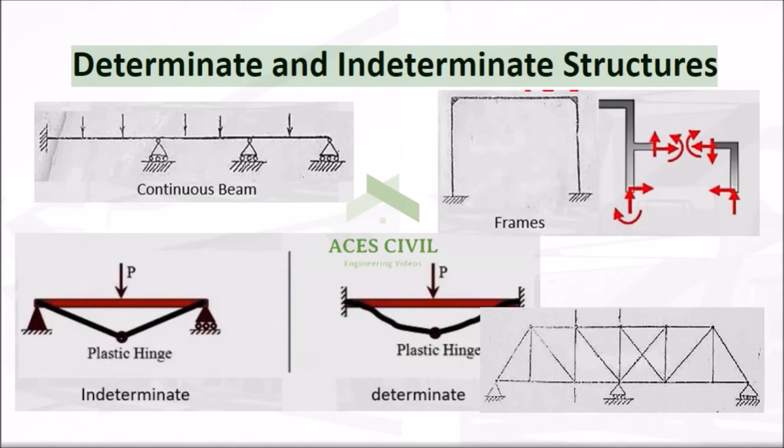In today's video we are going to discuss determinate and indeterminate structures. What is a structure? Why do we need to do analysis on a structure? Have you ever walked under a bridge or a megastructure and seen different joints between the beams and columns in the structure? Perhaps you've seen rollers and hinges and wondered if that is enough to support the structure. Isn't a fixed end more stable than a roller or a hinge?

Well, the answer is yes. However, sometimes stability creates risk of more exposure to types of stress, such as thermal stress.

A structure is an assemblage of a number of components like slabs, beams, columns, walls, foundations, and so on, which remains in equilibrium. It has to satisfy the fundamental criteria of strength, stiffness, economy, durability, and compatibility for its existence.

Any structure is designed for the stress resultants of bending moment, shear force, deflection, torsional stresses, and axial stresses. If these moments, shears, and stresses are evaluated at various critical sections, then based on these, the proportioning can be done.

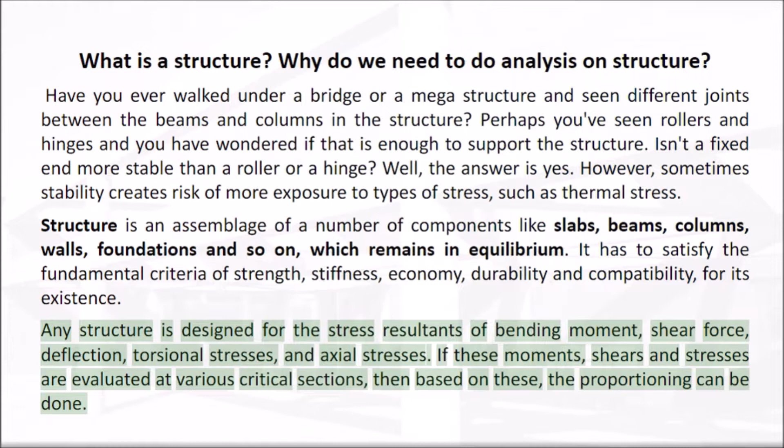An engineer's duty is to design structures in a professional, safe, and economical manner in order to fulfill the purpose for which it was designed in the first place.

Evaluation of these stresses, moments, and forces and plotting them for that structural component is known as analysis. Determination of dimensions for these components based on these stresses and proportioning is known as design.

Structural analysis. Structural analysis is the calculation of reaction forces, internal forces, stresses (shear and normal), bending moments, deflection, angle of rotation, etc. on a given structural member, provided different forces are determined.

Structural engineers make structural analysis in order to design structures to withstand the effects of possible forces on structures. Structures are generally classified into two categories, determinate and indeterminate (or redundant) structures, for analysis of structures to find forces.

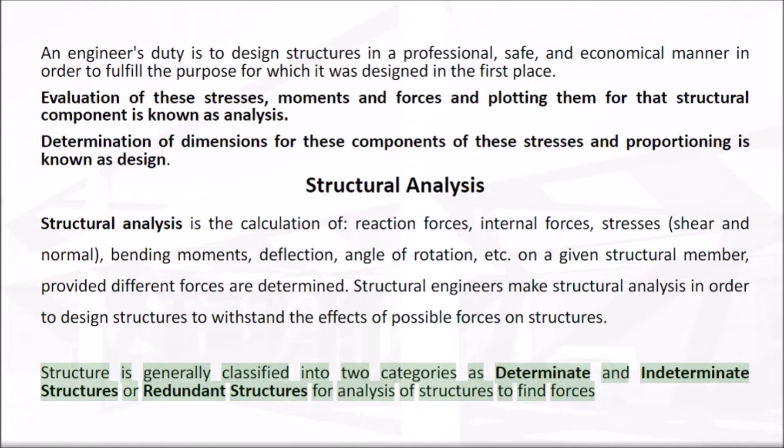Statically determinate structures are structures that can be analyzed using statics equations only, i.e., equilibrium in all directions. In some cases, statics, which means the sum of forces in any direction is zero and hence no acceleration is experienced, is enough to analyze a structure. These structures are referred to as statically determinate.

On the other hand, statically indeterminate structures can't be analyzed using statics equations only. They require other material properties, such as deformations, in order to analyze them.

Redundant or indeterminate structures are not capable of being analyzed by use of basic equilibrium equations alone. Along with the basic equilibrium equations, some extra conditions are required, like compatibility conditions of deformations, etc., to get the unknown reactions for drawing bending moment and shear force diagrams.

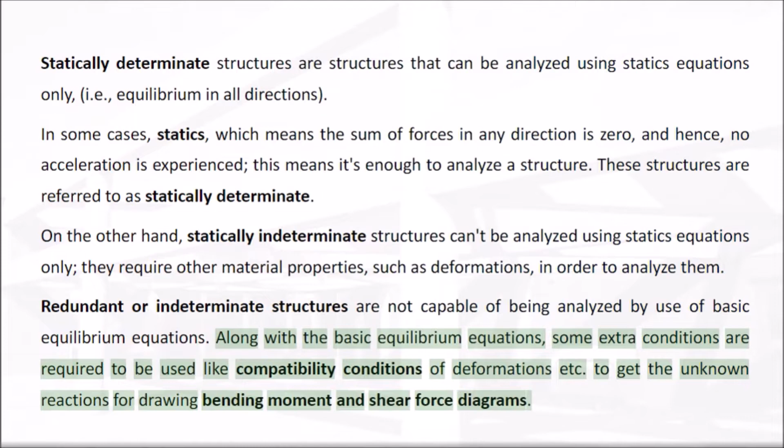A structure can be called determinate if the equilibrium equations provide enough and sufficient conditions for equilibrium. If all forces for a structure can be determined using equilibrium equations only, the structure is determinate. But if the unknown forces are more and can't be determined using equilibrium equations, then the structure is indeterminate.

In general, we can determine if a structure is statically determinate or indeterminate by drawing a free body diagram for the structure or part of it, and comparing the number of unknown forces and moment components with the number of available equilibrium equations. For coplanar structures, we have three equilibrium equations.

If n is the total number of parts and r is the number of unknown forces and moment components, then if r equals 3 times n, the structure is determinate. If r is greater than 3 times n, the structure is indeterminate.

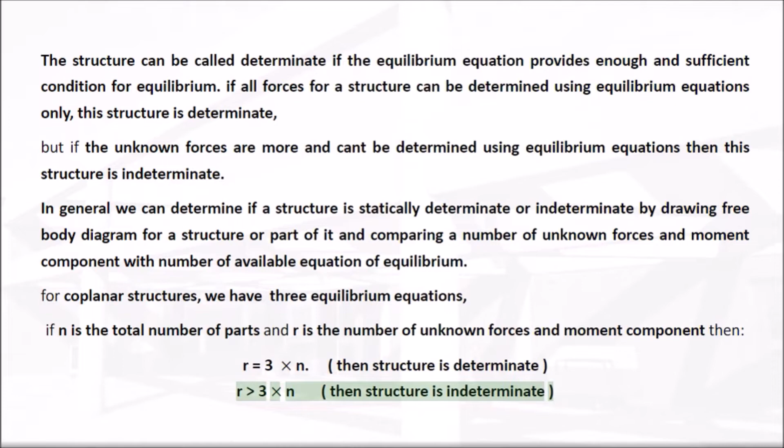In two-dimensional statics, the summation of forces in the x and y directions, and the summation of moments in the z direction, all must equal 0. In three-dimensional statics, the summation of forces in x, y, and z directions, and the summation of moments in x, y, and z directions, all must equal 0.

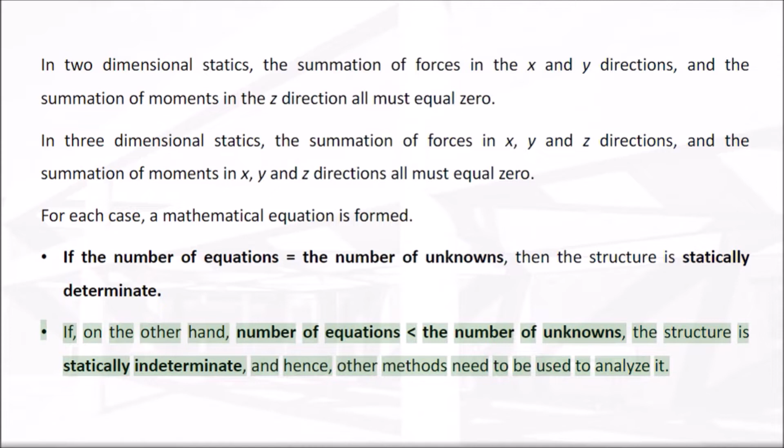For each case, a mathematical equation is formed. If the number of equations equals the number of unknowns, then the structure is statically determinate. If, on the other hand, the number of equations is less than the number of unknowns, the structure is indeterminate.

Some examples of statically determinate structures are shown in the figure above. Beams number 1 and 2 are statically determinate structures for the following reasons. Beam number 1: the number of unknown forces is 3, equal to the number of equations, which is 3. Beam number 2: the number of unknown forces is 3, equal to the number of equations, which is 3.

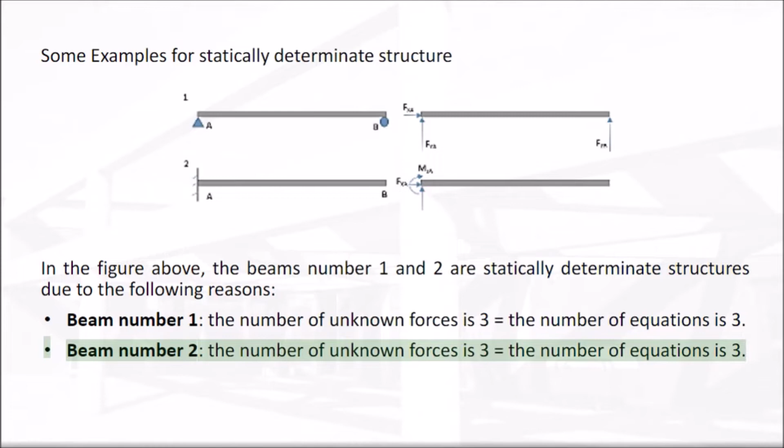Examples of determinate structures are simply supported beams, cantilever beams, single and double overhanging beams, three-hinged arches, etc.

Examples of indeterminate structures are fixed beams, continuous beams, fixed arches, two-hinged arches, portals, multistoried frames, etc. Special methods like strain energy method, slope deflection method, moment distribution method, column analogy method, virtual work method, matrix methods, etc. are used for the analysis of redundant or indeterminate structures.

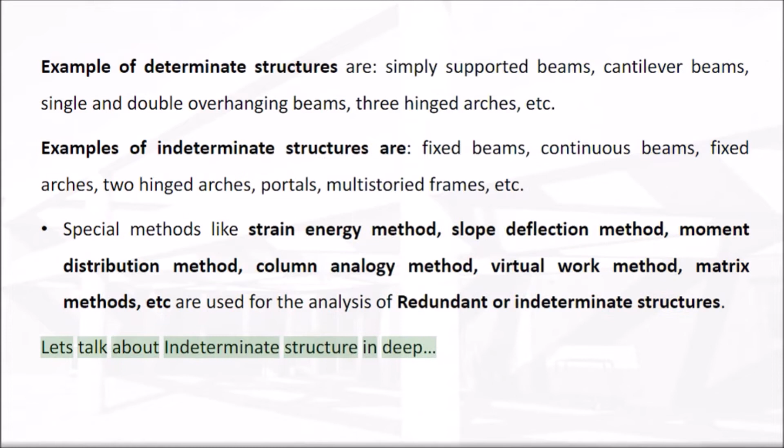Let's talk about indeterminate structures in depth. A structure is termed as statically indeterminate if it cannot be analyzed from principles of statics alone, that is, summation H, V, M is equal to 0 respectively.

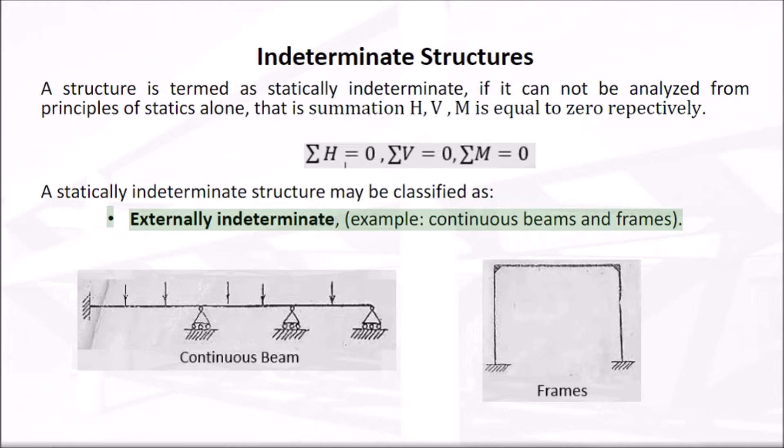A statically indeterminate structure may be classified as externally indeterminate, example, continuous beams and frames. If a structure is externally determinate, then all of the reactions may be calculated using equilibrium alone. To calculate external determinacy, the following equations are used.

Statically unstable externally: R less than 3 plus EC. Statically determinate externally: R equals 3 plus EC. Statically indeterminate externally: R more than 3 plus EC. Where R is the number of reaction components, and EC is the number of equations of condition.

Both of these are described in detail below. The degree of indeterminacy is given by the following equation: IE equals R minus (3 plus EC).

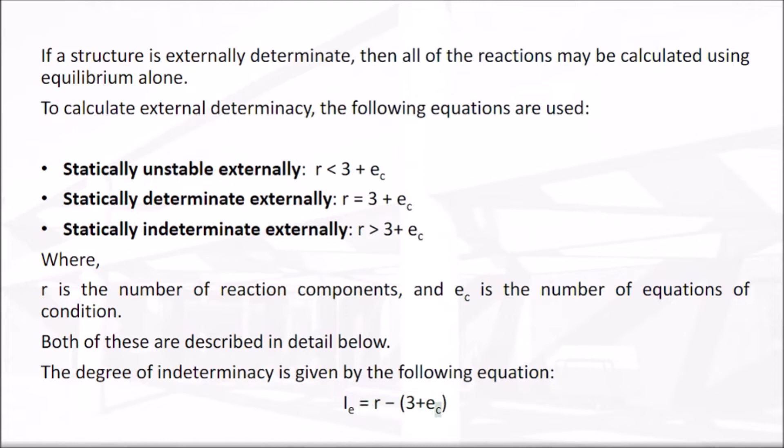Reaction components. In the equations above, R is equal to the total number of reaction components as shown in table. For multiple reaction points, R is the sum of all the components for all the reaction points in the structure. Support type schematics and reactions R.

Roller: R equals 1. Pin: R equals 2. Fixed: R equals 3.

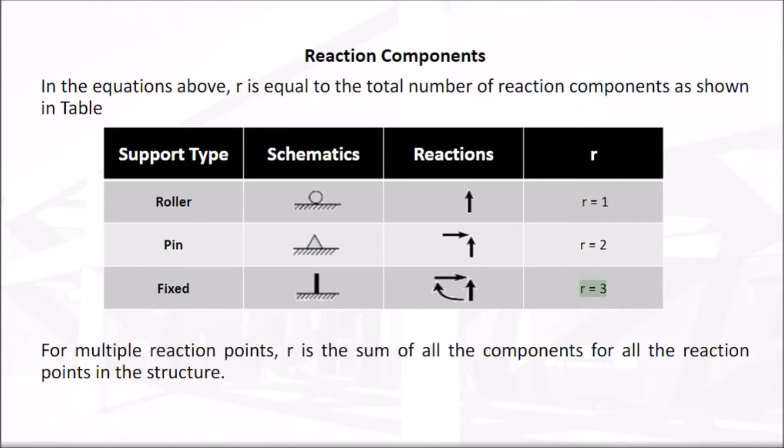Internally indeterminate, example, trusses shown in figure. If a structure is internally determinate, then all of the reactions and internal forces may be calculated using equilibrium alone. Internal determinacy is generally much more important than external determinacy in structural analysis. To calculate internal determinacy, the following equations are used.

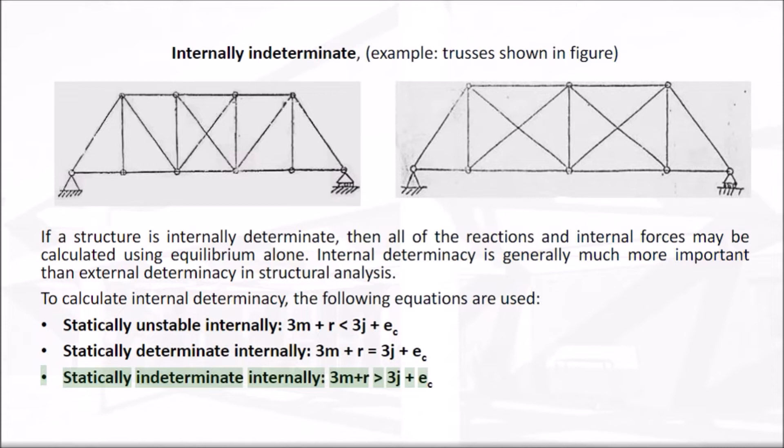Statically unstable internally: 3m plus R less than 3j plus EC. Statically determinate internally: 3m plus R equals 3j plus EC. Statically indeterminate internally: 3m plus R greater than 3j plus EC.

Where m is the total number of members in the structure, R is the number of reaction components, J is the total number of joints in the structure, and EC is the number of equations of condition. The meaning of R and EC are the same as for external determinacy.

The degree of indeterminacy is given by the following equation: IE equals 3m plus R, minus 3j plus EC.

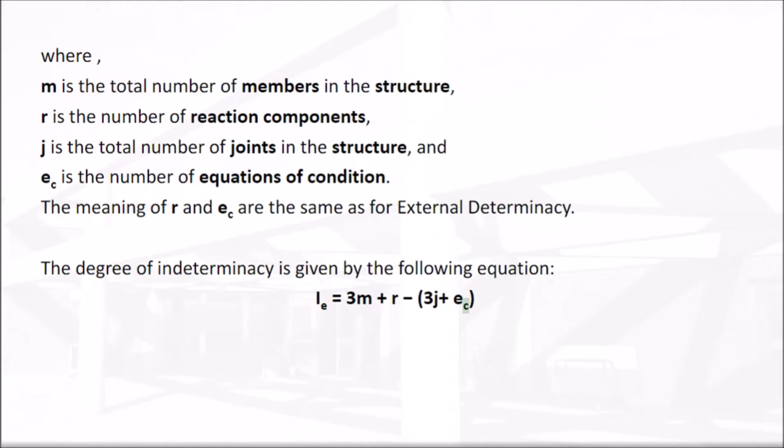Members and joints. There is no specific way that a structure must be split into members and joints for the purposes of the determinacy analysis. Any division of the structure is okay as long as the members and joints are consistent with each other.

However, joints should be placed at least at the following locations: free ends, reactions, and intersections of three or more elements.

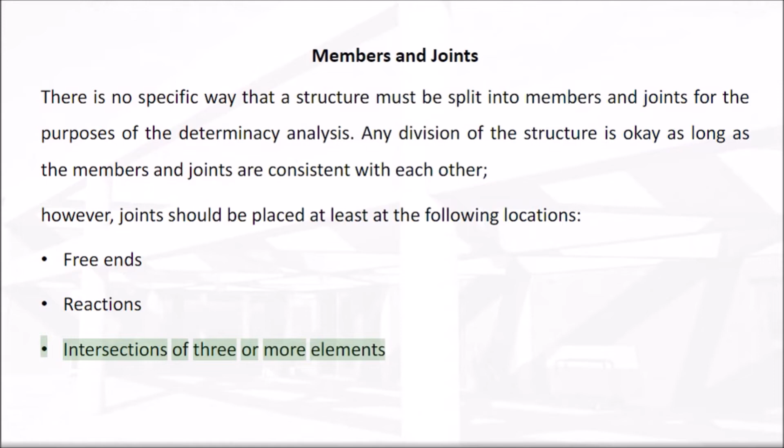Both externally and internally indeterminate, example, trussed beams, continuous trusses. A truss is statically determinate, both externally and internally when: A. All the reactions can be determined from the conditions of equilibrium, namely summation H, V, M is equal to 0 respectively, and

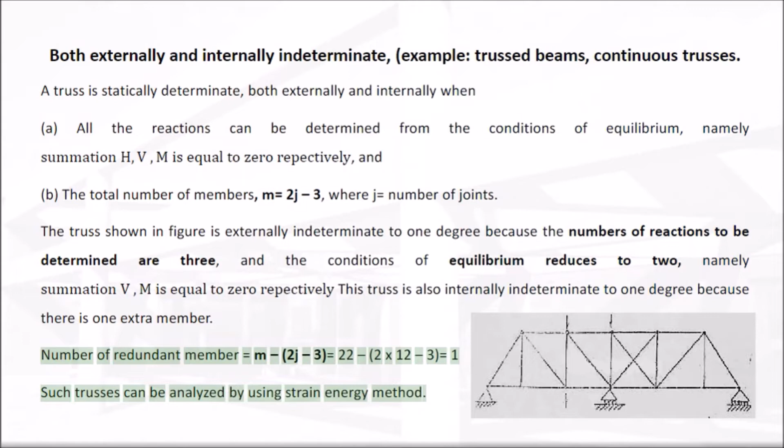Number of redundant members equals M minus (2J minus 3), equals 22 minus (2x12 minus 3), equals 1. Such trusses can be analyzed using the strain energy method.

Determinacy of beams for a coplanar, two-dimensional beam. There are at most 3 equilibrium equations for each part, so that if there is a total of n parts and r reactions, we have R equals 3n, statically determinate.

R greater than 3n, statically indeterminate. Indeterminate structures effectively have more unknowns than can be solved using the 3 equilibrium equations, or 6 equilibrium equations in 3D. The extra unknowns are called redundants. The degree of indeterminacy is equal to the number of redundants. An indeterminate structure with 2 redundants may be said to be statically indeterminate to the 2nd degree.

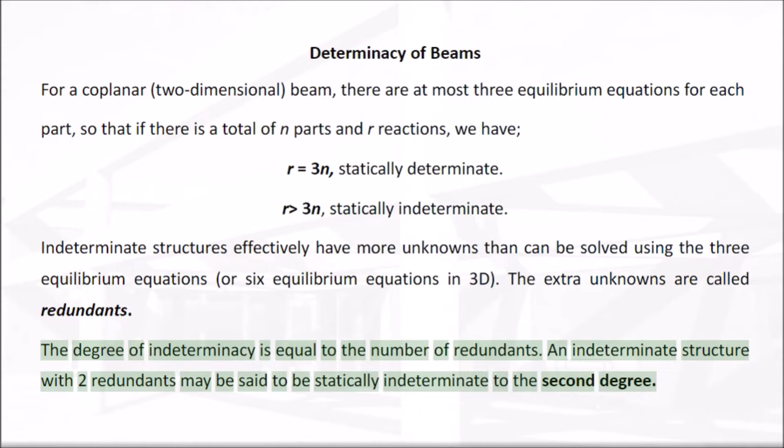Examples showing determinate and indeterminate structures. Example 1: Classify if each of the following beams is determinate or indeterminate. If statically indeterminate, what is the number of degree of indeterminacy?

1. If n is number of structure parts and r is number of unknown forces: R equals 3n, statically determinate; R greater than 3n, statically indeterminate. Here, r equals 3 and n equals 1, then here r is equal to 3n, hence structure is statically determinate.

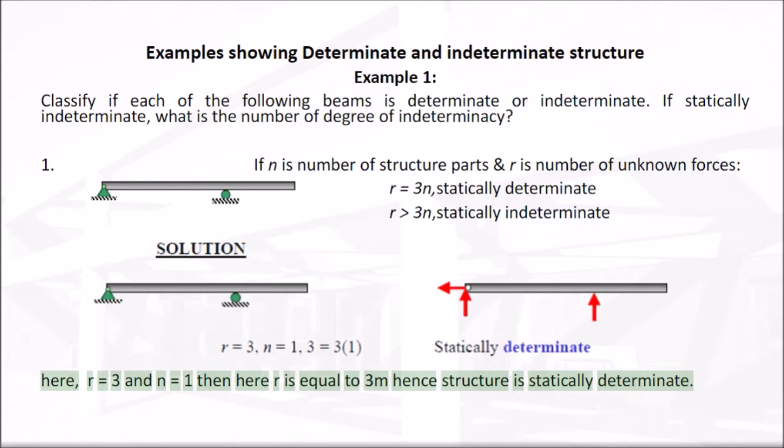2. Fixed support with rollers. 3. Roller support with hinges. Here, r equals 5 and n equals 1, then here r is more than 3n, and hence structure is statically indeterminate to 2nd degree.

Here, r equals 6 and n equals 2, then here r is equal to 3n, and hence the structure is statically determinate.

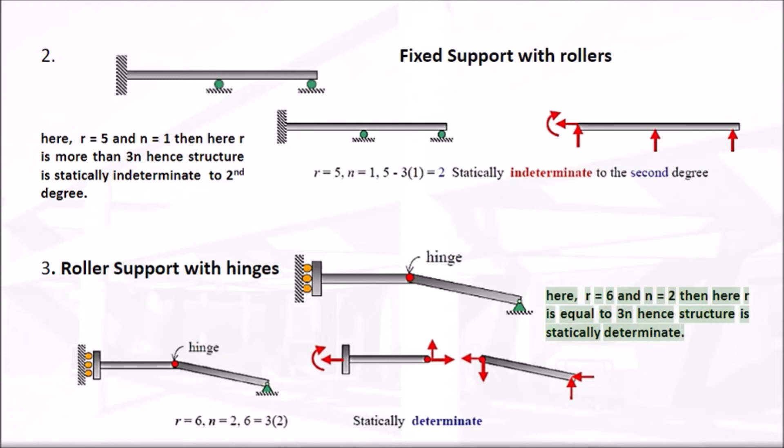4. Fixed support with hinges. If n is the number of structure parts and r is the number of unknown forces: r equals 3n means statically determinate, r greater than 3n means statically indeterminate. Here, r equals 10 and n equals 3, so r is more than 3n, and hence the structure is statically indeterminate to the 1st degree.

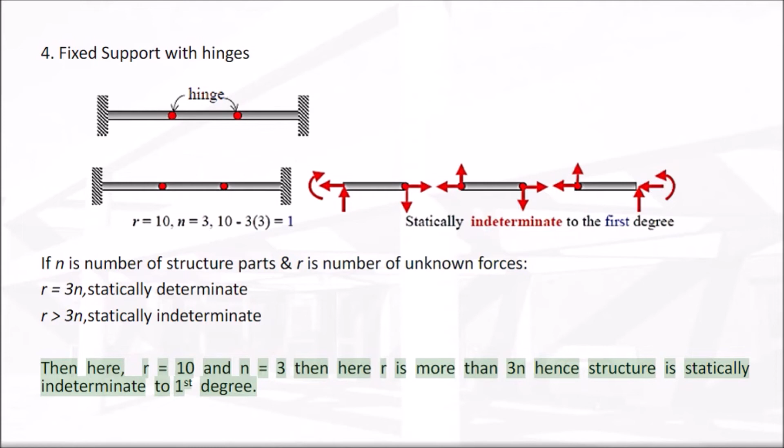5. Example showing another indeterminate structure. If n is the number of structure parts and r is the number of unknown forces: r equals 3n statically determinate, r greater than 3n statically indeterminate. Here, r equals 10 and n equals 2, so r is more than 3n, and hence the structure is statically indeterminate to the 4th degree.

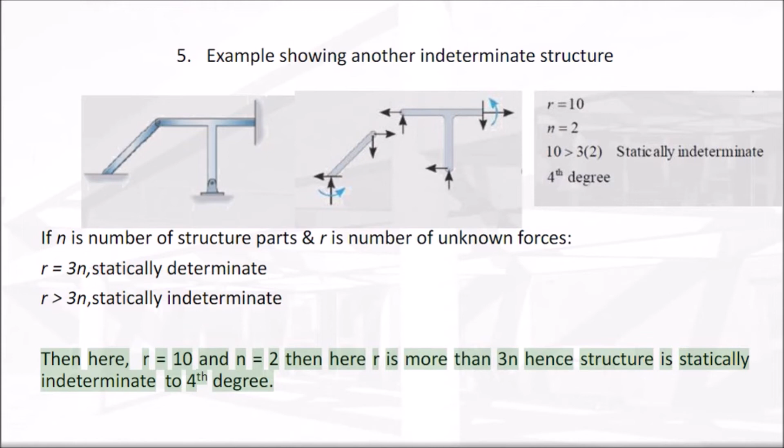Example 2. Classify whether each of the following frames is determinate or indeterminate. If statically indeterminate, what is the degree of indeterminacy?

1. Here, r equals 9 and n equals 2, so r is more than 3n, and hence the structure is statically indeterminate to the 3rd degree.

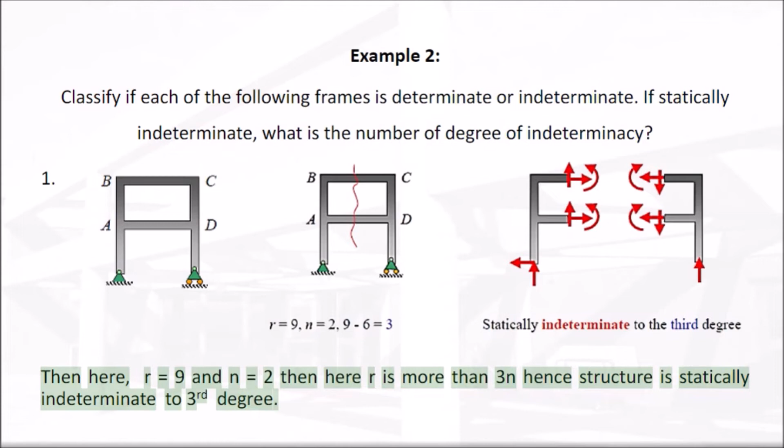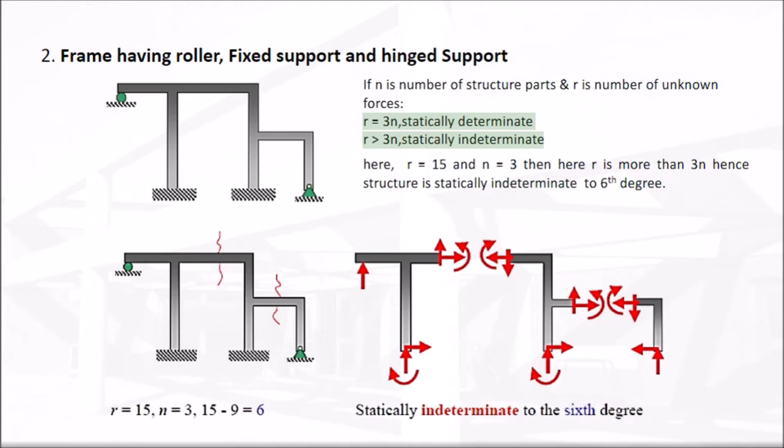Difference between determinate and indeterminate structures: in determinate structures, equilibrium conditions are fully adequate to analyze the structure, while in indeterminate structures, conditions of equilibrium are not adequate to fully analyze the structure.

In determinate structures, the bending moment or shear force at any section is independent of the material property of the structure, while in indeterminate structures, the bending moment or shear force at any section depends upon the material property.

In determinate structures, the bending moment or shear force at any section is independent of the cross-section or moment of inertia, while in indeterminate structures, it depends upon the cross-section or moment of inertia.

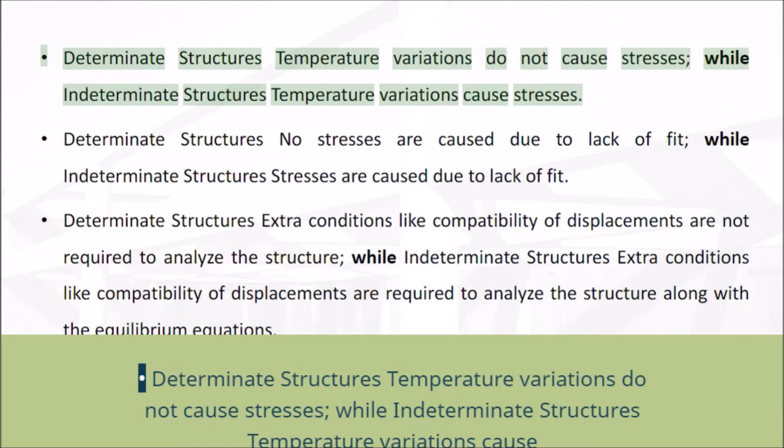In determinate structures, temperature variations do not cause stresses, while in indeterminate structures, temperature variations cause stresses.

In determinate structures, no stresses are caused due to lack of fit, while in indeterminate structures, stresses are caused due to lack of fit.

In determinate structures, extra conditions like compatibility of displacements are not required to analyze the structure, while in indeterminate structures, extra conditions like compatibility of displacements are required along with the equilibrium equations.

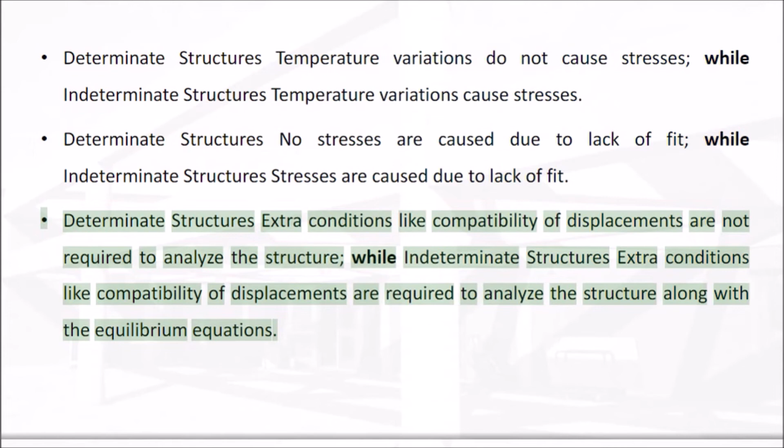Difference between determinate and indeterminate structures. Number 1: for determinate structures, equilibrium conditions are fully adequate to analyze the structure. For indeterminate structures, conditions of equilibrium are not adequate to fully analyze the structure.

2. Bending moment or shear force at any section is independent of the material property of the structure for determinate structures. For indeterminate structures, bending moment or shear force at any section depends upon the material property.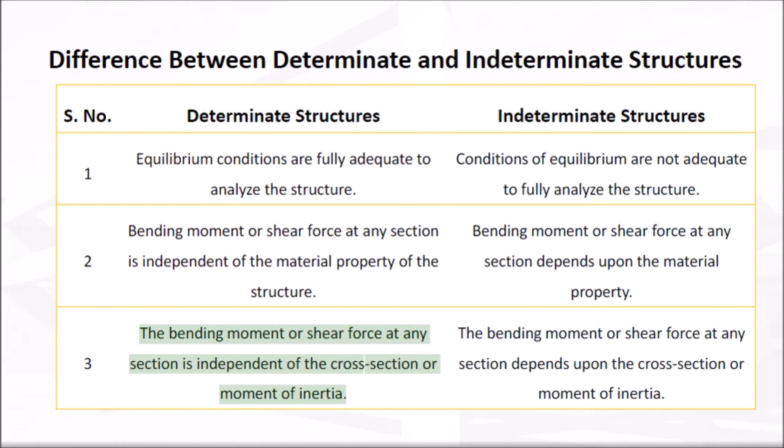3. The bending moment or shear force at any section is independent of the cross-section or moment of inertia for determinate structures. For indeterminate structures, it depends upon the cross-section or moment of inertia.

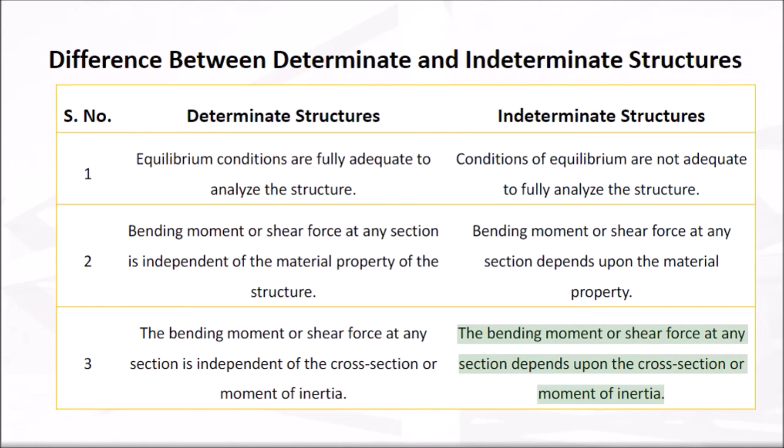4. Temperature variations do not cause stresses in determinate structures. Temperature variations cause stresses in indeterminate structures.

5. No stresses are caused due to lack of fit in determinate structures. Stresses are caused due to lack of fit in indeterminate structures.

6. Extra conditions like compatibility of displacements are not required to analyze determinate structures. Extra conditions like compatibility of displacements are required to analyze indeterminate structures, along with the equilibrium equations.

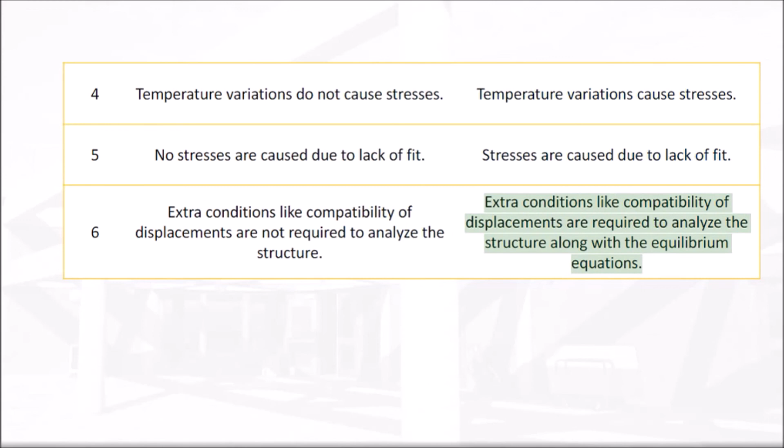A statically determinate system is neither better nor worse than a statically indeterminate system. It may be stronger or weaker depending on the details of the two systems. Though, look at the advantages it can provide. When we provide more support and/or members to a structure than required for static stability, it makes the structure indeterminate. By providing this excess member, it ensures stability and also increases stiffness of the member or structure. Such as in the case of a truss, we provide additional diagonal members to ensure stability.

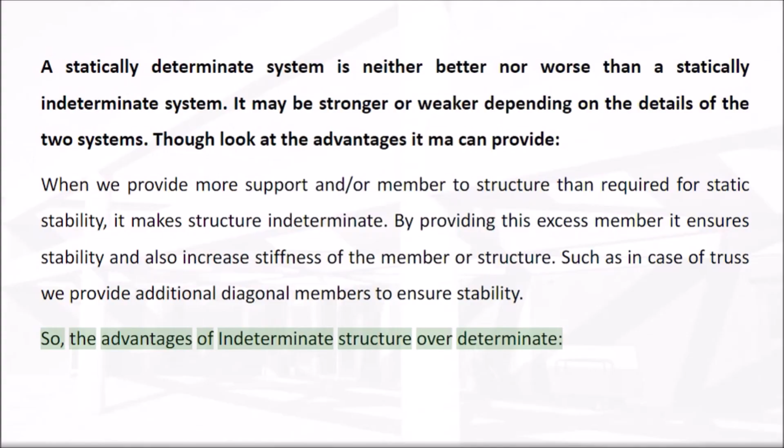So, the advantages of indeterminate structures over determinate ones: stresses in indeterminate structures are generally lower than in determinate structures (see figure). Deflection in indeterminate structures is less compared to determinate structures due to greater stiffness (see figure).

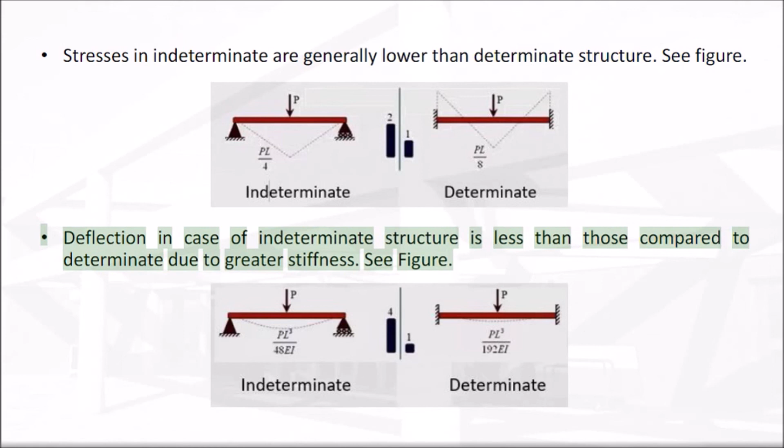Statically indeterminate structures have the capacity to redistribute loads. If a part, member, or support of such a structure fails, the entire structure will not necessarily collapse, and the loads will be redistributed to the adjacent portions of the structure. See figure.

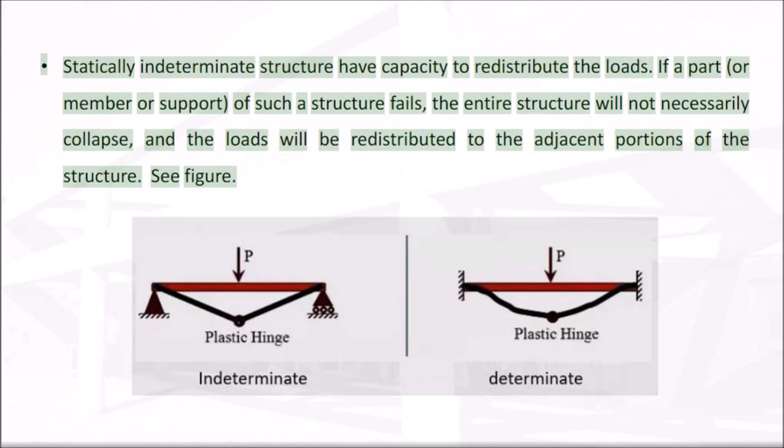Methods of analyzing indeterminate structures: Member flexibility, Direct stiffness method, Member stiffness relations, System stiffness relation, Moment distribution method, Principle of superposition, Compatibility equation and solution, Force displacement relations, Slope deflection method, Force method, Integration method.

These methods will be discussed one by one in other videos.